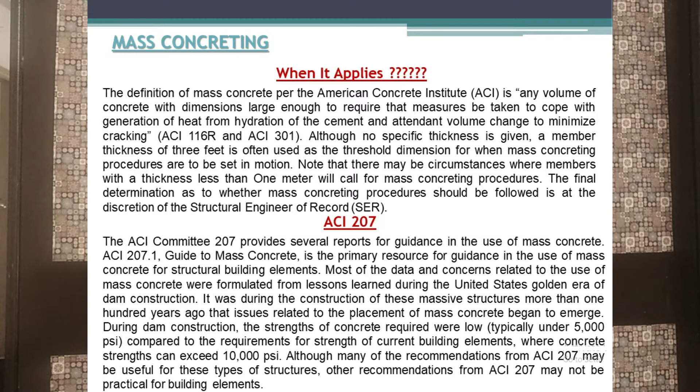If you see this definition in double quotes on the side, it doesn't mention any size, thickness or length. But in parallel, ACI 207 and 116R refer to an ideal thickness of concrete for mass concrete design, limited to 1 meter. That is, if you are going beyond 1 meter, you should design for mass concrete. Right? Now, when we say mass concrete design, is it such big rocket science?

In the 1940s, there was no concept of mass concreting everywhere. The only concept of mass concreting available was for dams. Hence, mass concreting for dams started. Designing mass concrete for dams was much easier because temperature was kept as the focus compared to the strength of the concrete.

As time passed, changes happened. People started designing big structures like bridges, thicker walls, retaining walls, mass foundations, rafts, pile caps. And when we started focusing on strength, there were many issues related to cracks and abnormal changes due to heat of hydration in the concrete. So design for the specific requirement came into the picture.

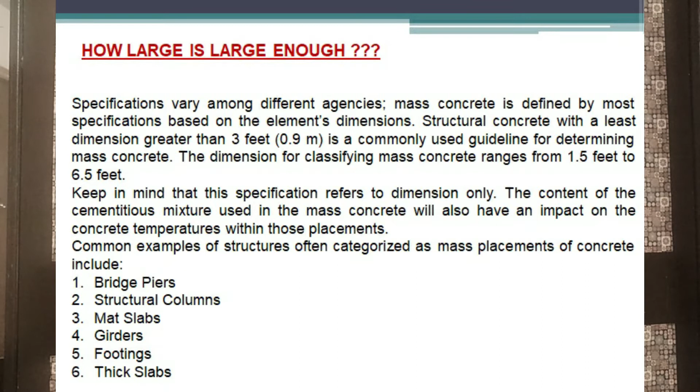Now as per study, concrete faces heat of hydration of the cement when it comes in contact with water. This is very basic information which I am giving. Whenever the heat of hydration releases, the concrete starts getting warm, and the temperature sometimes goes beyond around 70 or 71 degrees, and there the requirement of engineering control comes into the picture.

So what does ACI 301 say here? The maximum temperature at the core of the concrete shall not exceed 160 degrees Fahrenheit, that is 71.1 degrees centigrade, during curing. That means the temperature of the concrete should be controlled till the deshuttering and early curing periods.

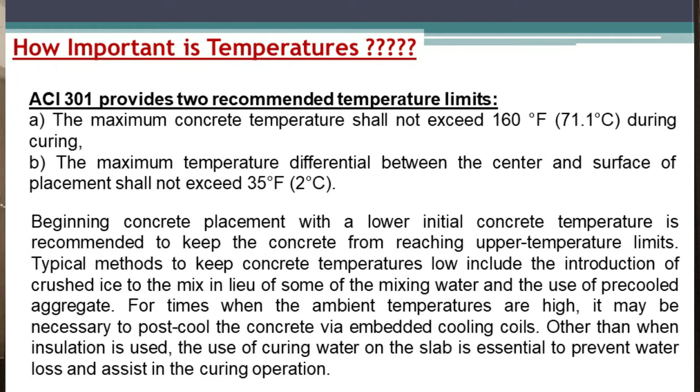That is why ACI is focusing on controlling the temperature at the core, because surface temperature can be controlled by using many norms like early curing with chilled or cold water, avoiding sunlight falling directly on the slab or concrete surface, avoiding wind blow so that surface hardening or drying will be avoided, fogging, putting a wet hessian cloth on the concrete.

There are many things which you can control on the surface, but the question is how to control the temperature at the core. So let us see how we control the temperature at the core during concreting and after concreting. Friends, when we say the core, we mean below the reinforcement top mat, or a central portion of the concrete volume. That means the core is the mid portion or early portion of the concrete pour sequence.

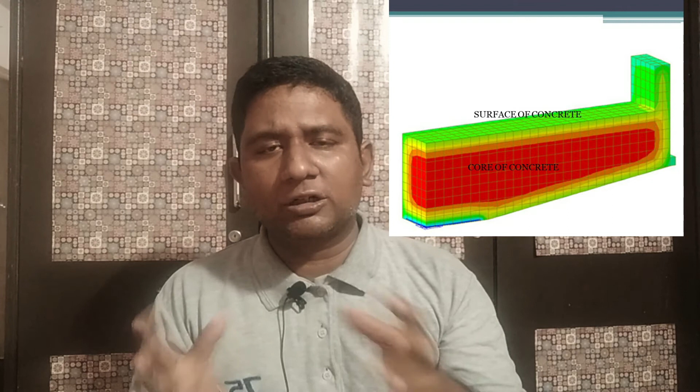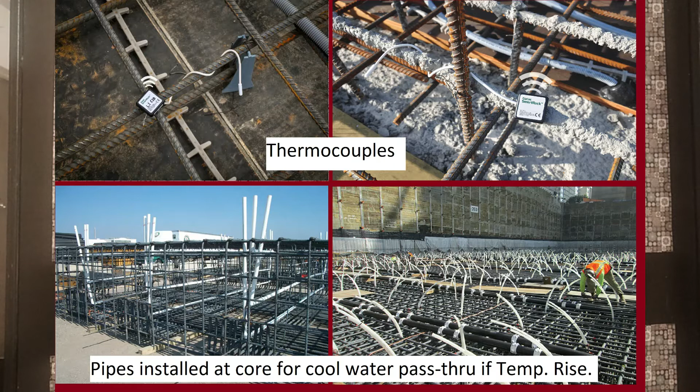There is an instrument called a thermocouple which has a sensor, and nowadays the technology is so advanced that these thermocouples are totally Android or app based, which can be controlled or monitored over mobile and even documented through mobile. Let us not go into the technology of the thermocouple. A thermocouple is an instrument which will have multiple sensors and a monitoring or output device, and the sensors will be put inside the raft. It will reach to the core. Now, as the concreting progresses, we will start monitoring the temperature variations in the concrete, and that will indicate the ongoing temperature on your monitor, control panel or display board.

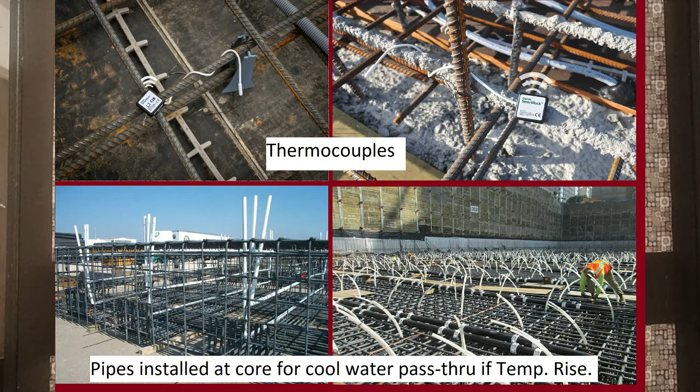There is another arrangement which is generally planned, which you can see in the box here in the pic, where in many areas pipes will be laid in the core. As the concrete starts warming up, cold water will be passed through those pipes and it will try to maintain the temperature for a longer period. The chilled water circulation is done to keep the core controlled, because we have to maintain the difference between the surface and the core as well. Then once the curing period is over and the purpose is solved, these pipes will be grouted with pressure grout and plugged. That's a different case.

The next question is, what if the concrete temperature itself is high, like the production concrete temperature? For that we have to use basic concrete temperature control methods, that is cooling the aggregates, using ice in the concrete, and reducing the traveling time of concrete trucks. Pouring time should be reduced. You can use multiple pouring points in case of big rafts. These are all the basic common methods we can use for controlling the wet concrete temperature during the pour.

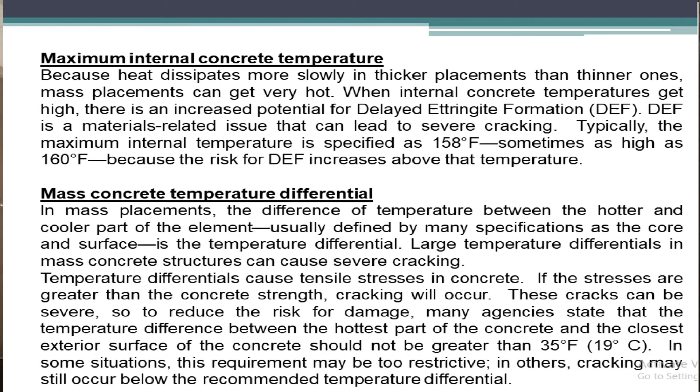And temperature difference also causes issues many times. The moment the temperature difference between core and surface increases, tensile stresses will get generated, and if the stresses are greater than the concrete strength, cracks will start occurring and lead towards the surface. These cracks can be severe, or sometimes these cracks will be present in the core, and if anything goes wrong with the compression member, a load, lateral load or any kind of deflection, this crack will be the weakest point of the structure, which is again a more dangerous issue.

As far as possible, maintain the difference between the surface and the core; as I mentioned, 2 to 3 degrees should be the difference between the two temperatures. The wet concrete temperature must be controlled within 32 to 35 degrees. It should be less than 32, and the lesser the better. I hope I am very clear in this, that lower temperature of the wet concrete will lead to less hydration heat in the core.

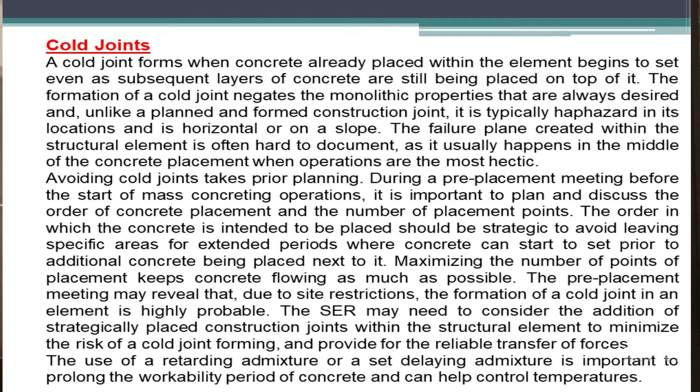Now we have many challenges, like many times breakdowns happen, pump breakdowns, plant breakdowns, or sometimes delay in pouring due to workman issues. There are many things which are unplanned. There are delays due to workman absence or some issues. There are many things which will cause a delay or a pause in the concrete pouring.

So for that, as I mentioned in earlier videos, pour plan. The pour plan should be ready at least 72 hours before the planned concrete. Second thing, any kind of forcible cold joint has to be noted in the diagram or drawing. The exact location of the cold joint should be noted by the engineer, so that in case something happens in the future or the designer asks for the cold joint location for analyzing structure defects or redesigning the structure, it should be easy to produce in front of the designer.

Third thing is giving a proper justification using bonding agents. Give proper respect to the cold joint and try to merge it and make it monolithic as much as possible. And if you still can't avoid it, go to the designer and ask for a modification in the drawing considering the forcible cold joint which has turned into a construction joint.

Friends, at the last, our focus on mass concrete is to control the temperature. The more you focus on controlling the temperature, the better quality you can expect, right? During this temperature monitoring, what do we understand? We come to know many characteristics of the concrete. For example, what material, what kind of cement, what combination when I mix it, and what temperature I am getting. That is the first basic element we will understand in the concrete.

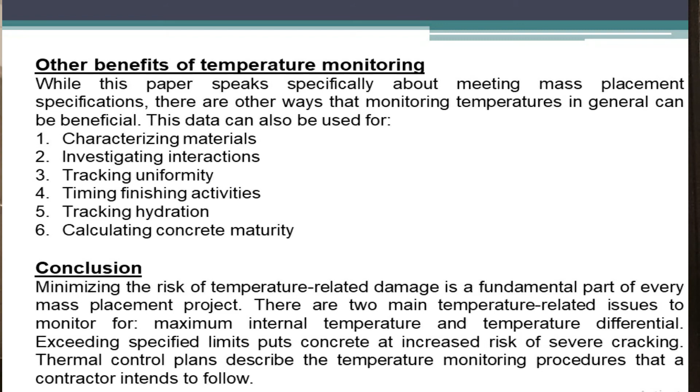Furthermore, the thermal control plan has to be established along with the pour plan, and it should describe the temperature monitoring procedure: what kind of thermocouples, what technology, what calibration, what average temperature is expected, and what procedure the contractor intends to follow. All these things should be gathered and approved by the contractor and the client before starting the pour. In my practice, we recommend 72 hours because we need enough time to understand, negotiate, discuss and conclude the pour plan.

This is what I tried to cover in today's session.